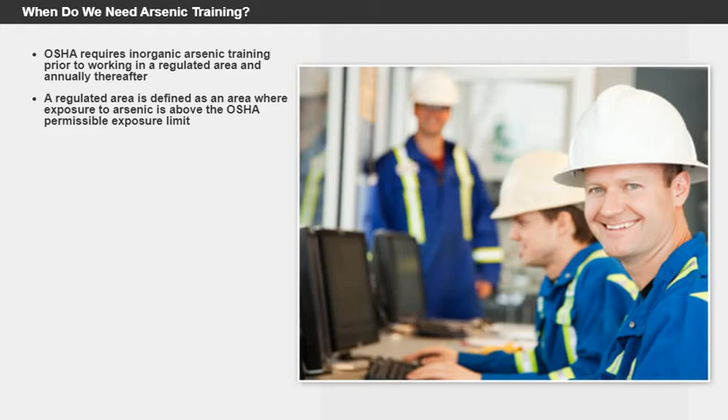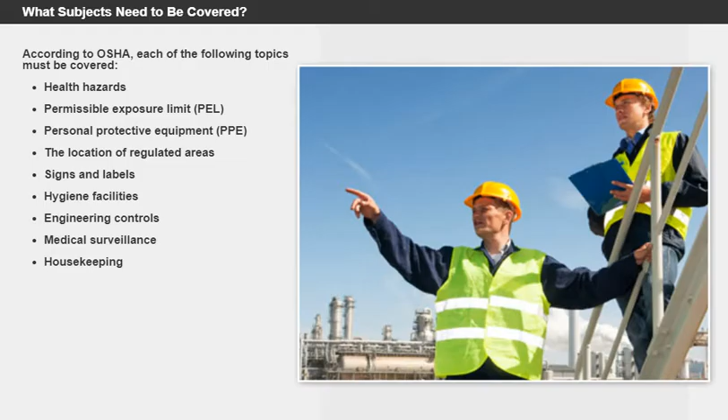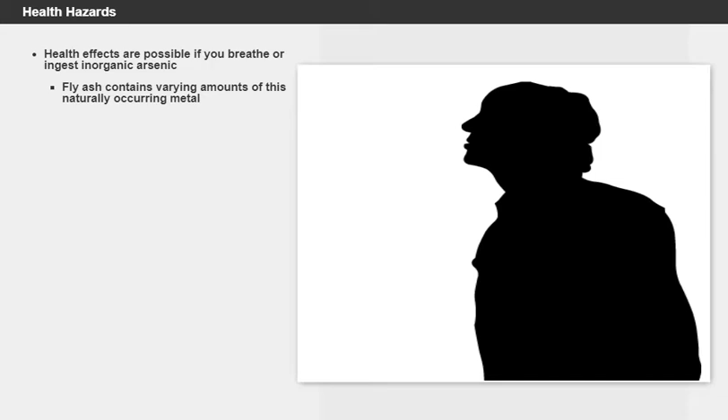Health hazards. Health effects are possible if you breathe or ingest inorganic arsenic. Fly ash contains varying amounts of this naturally occurring metal. Inhalation is the most likely route of exposure, but ingestion is also possible.

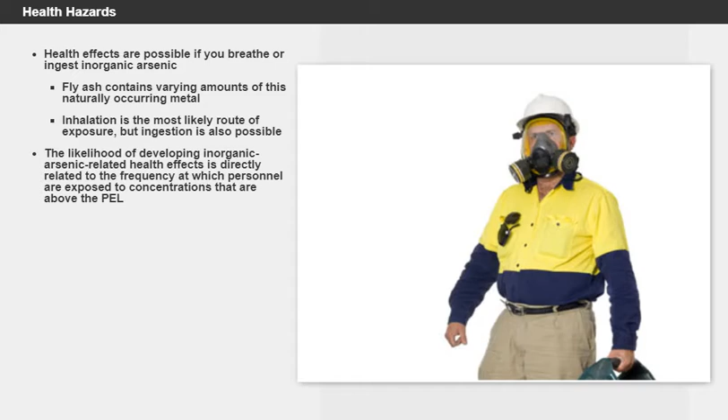The likelihood of developing inorganic arsenic-related health effects is directly related to the frequency at which personnel are exposed to concentrations that are above the PEL. OSHA requires that physicals be offered for anyone who spends more than 30 days per year in a regulated area.

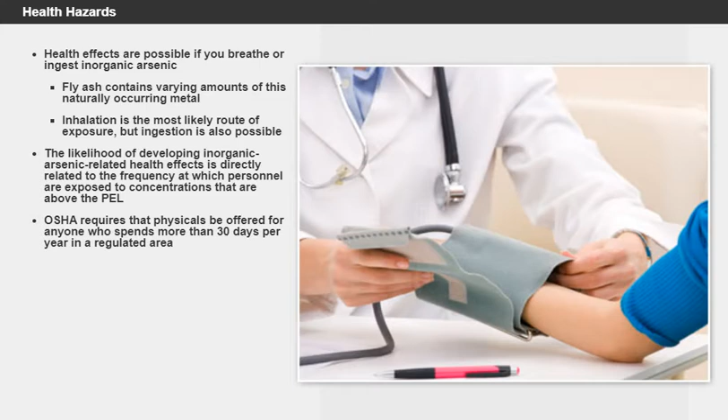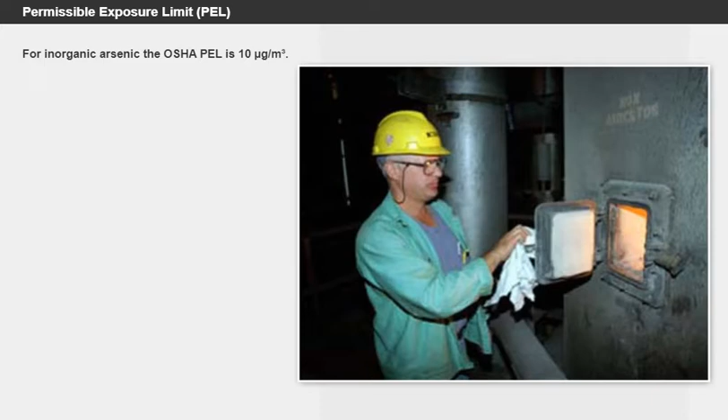Permissible exposure limit, or PEL. For inorganic arsenic, the OSHA PEL is 10 micrograms per cubic meter. This means that the average person can be exposed to 10 micrograms per cubic meter for 8 hours a day, 40 hours a week, without adverse health effects.

Any work area having greater than 10 micrograms per cubic meter must be established as a regulated area. The PEL refers to airborne concentrations of inorganic arsenic.

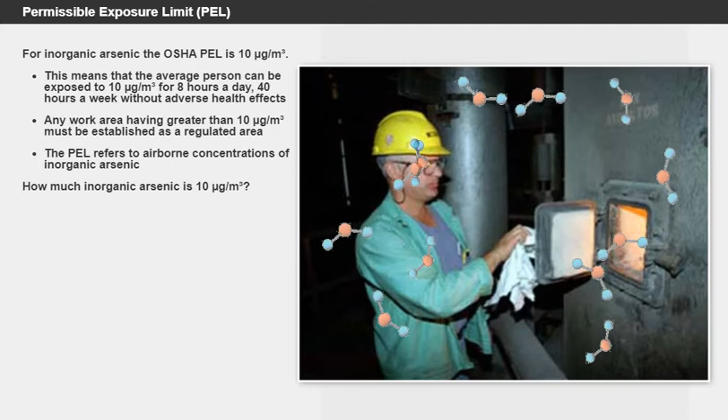How much inorganic arsenic is 10 micrograms per cubic meter? Air sampling equipment is necessary to identify how much inorganic arsenic is present in the air. There are many factors that influence the airborne concentration, and it is not possible to determine the concentration without air sampling and lab analysis.

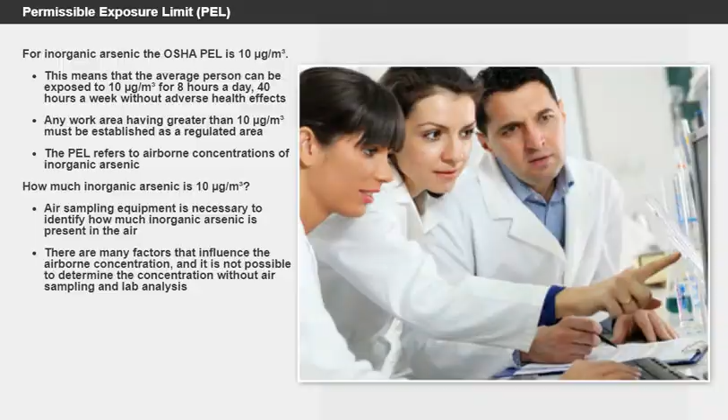Personal protective equipment. Respiratory protection is used to protect personnel from inhaling inorganic arsenic. Other PPE, such as coveralls and gloves, are used to help keep the fly ash within the regulated area and off your skin. Respirators can be easily cleaned to remove any fly ash, but coveralls need to be laundered.

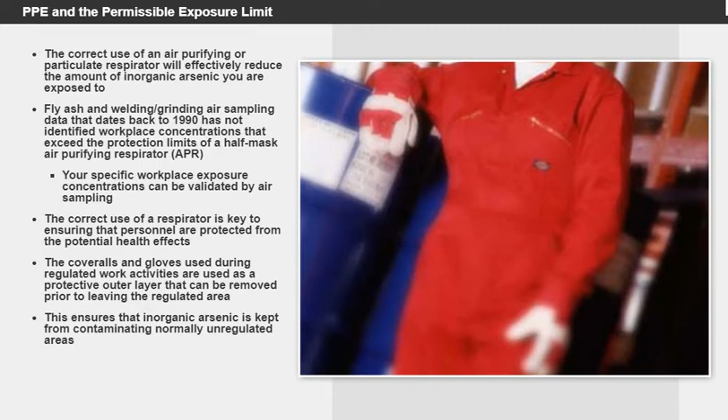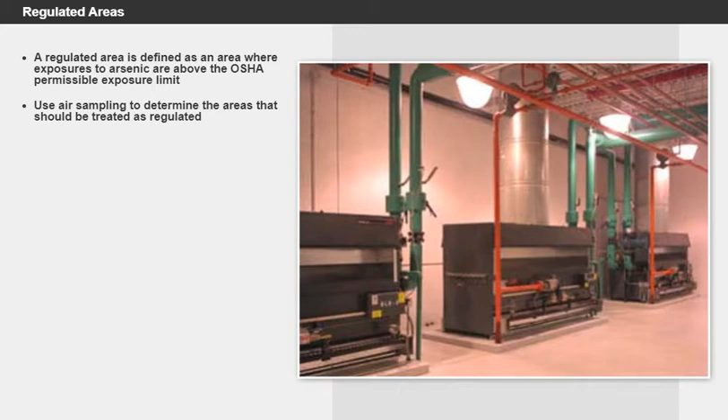Regulated areas. A regulated area is defined as an area where exposures to arsenic are above the OSHA permissible exposure limit. Use air sampling to determine the areas that should be treated as regulated. Examples may include boilers and boiler rooms, a furnace and its surrounding areas, any ductwork and stacks from a furnace, air preheaters, airflow wind boxes, ventilation penthouses, and any bag houses, ash hoppers, or silos.

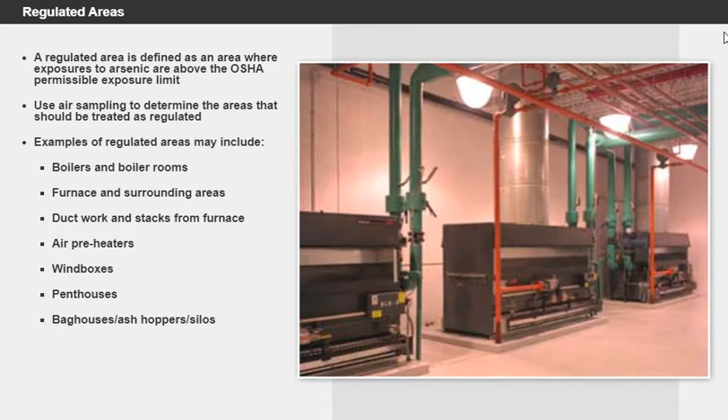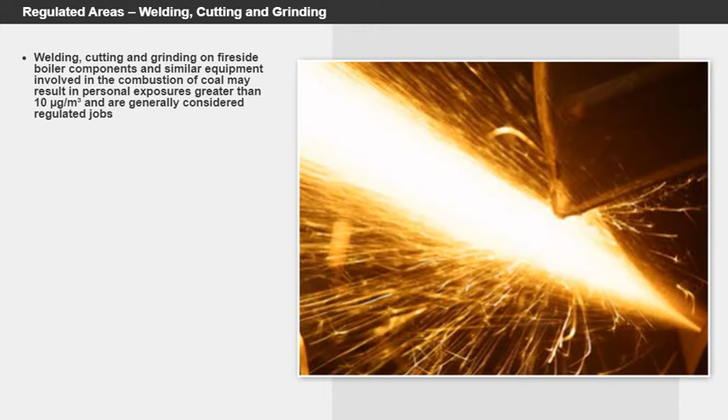Regulated areas: welding, cutting, and grinding. Welding, cutting, and grinding on fireside boiler components and similar equipment involved in the combustion of coal may result in personal exposures greater than 10 micrograms per cubic meter and are generally considered regulated jobs. Under these conditions, the inorganic arsenic is not in the form of ash and therefore cannot be washed or vacuumed off the boiler components or similar equipment. The high boiler temperatures cause the inorganic arsenic to plate out onto the boiler components. Typical air sampling data indicate that there are no significant exposure concerns at a distance of 6 feet or greater from these activities. Proper industrial hygiene air sampling must be used to determine exact exposure potentials.

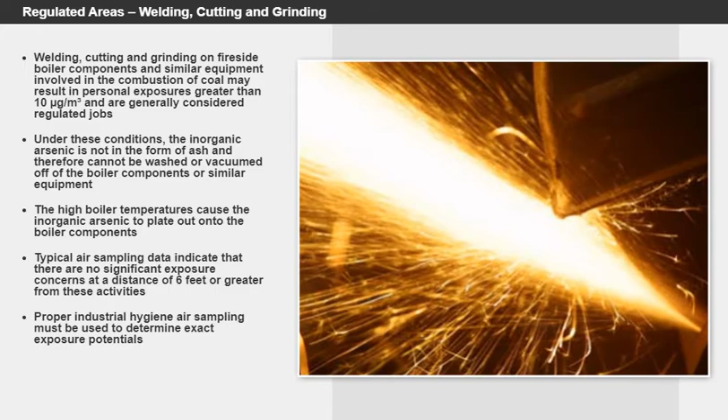Let's try an activity to see what you've learned so far. Fill in the blanks by clicking and dragging the correct words to the sentences.

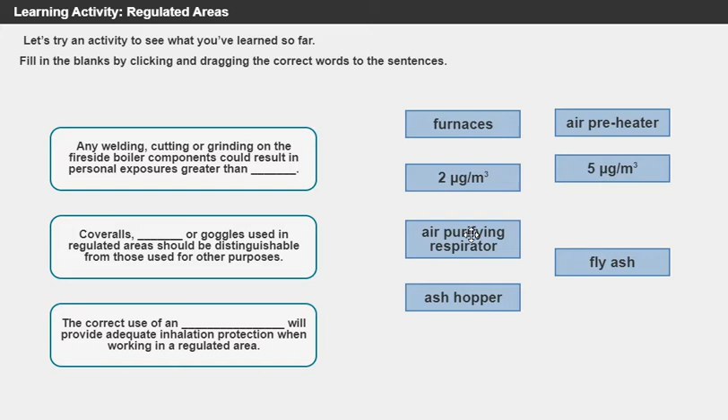Signs and labels. OSHA requires that signs be posted to identify all regulated work areas. These signs must read as follows: danger, inorganic arsenic, cancer hazard, authorized personnel only, no smoking or eating, respirator required.

Hygiene facilities. If you work in a regulated area, OSHA requires that you be provided with hygiene facilities. These facilities are provided so that personnel can wash their hands and face before eating and or drinking, and for showering after the work shift. Under no circumstances is it acceptable to eat or drink in a regulated area. Good hygiene practices before breaks and at the end of your shift will ensure that exposure to inorganic arsenic is kept to a minimum. OSHA also requires that personnel be provided a place to eat meals that is removed from any regulated area.

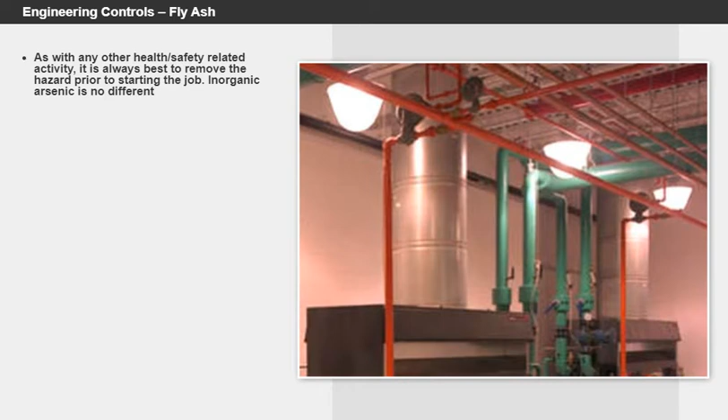Engineering controls, fly ash. As with any other health or safety-related activity, it is always best to remove the hazard prior to starting the job. Inorganic arsenic is no different. For example, a regulated area can be reclassified as unregulated if the fly ash can be removed by vacuuming using an industrial vacuum equipped with a HEPA filter, or washing. The cleaning process may or may not be a regulated activity, but it is best to treat it as regulated until air sampling shows that it is not. Proper PPE must be worn during the cleaning process.

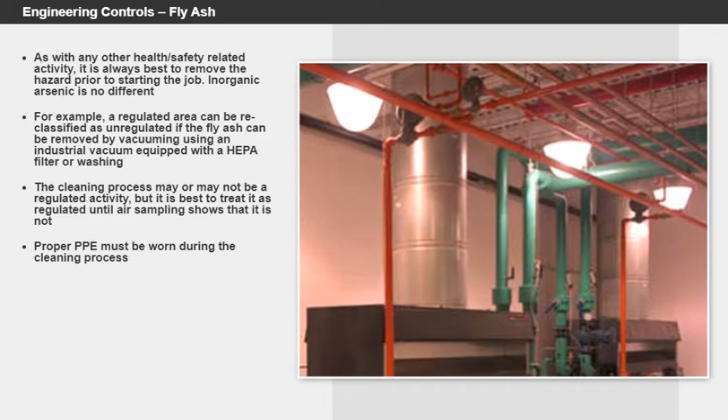Engineering controls: welding, grinding, cutting. For regulated jobs such as welding on the fireside boiler components, the task of removing the inorganic arsenic is not simple. The arsenic metal actually gets plated out on the boiler components. As a result, it's not reasonably possible to remove the inorganic arsenic prior to welding, grinding, or cutting.

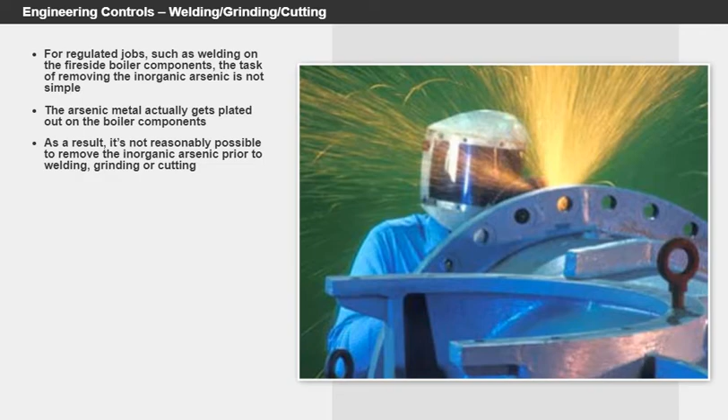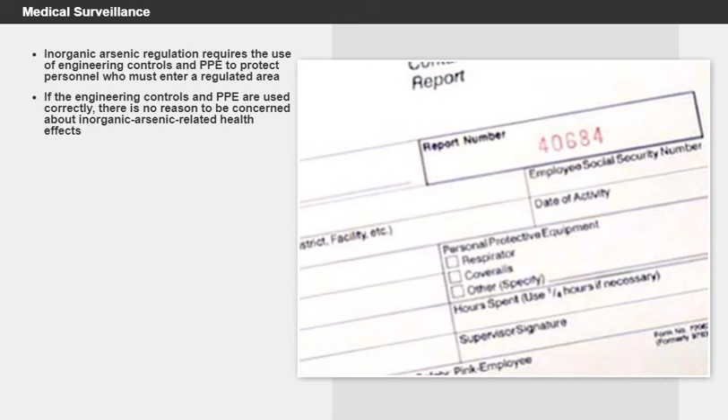Medical surveillance. The inorganic arsenic regulation requires the use of engineering controls and PPE to protect personnel who must enter a regulated area. If the engineering controls and PPE are used correctly, there is no reason to be concerned about inorganic arsenic-related health effects. In order to ensure effective personal protection, OSHA also requires that the employer implement a medical surveillance program. It is your responsibility to fill out a contamination exposure time report form for every shift that you enter a regulated area. Personnel exceeding 30 days per year or 240 hours in a regulated area will be offered a medical examination. Contact your supervisor if you have any questions.

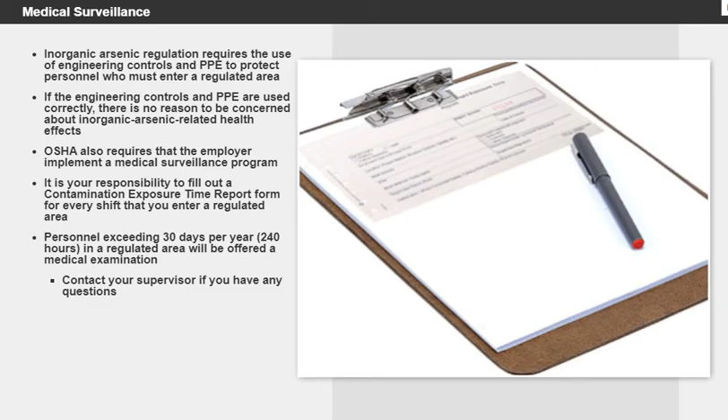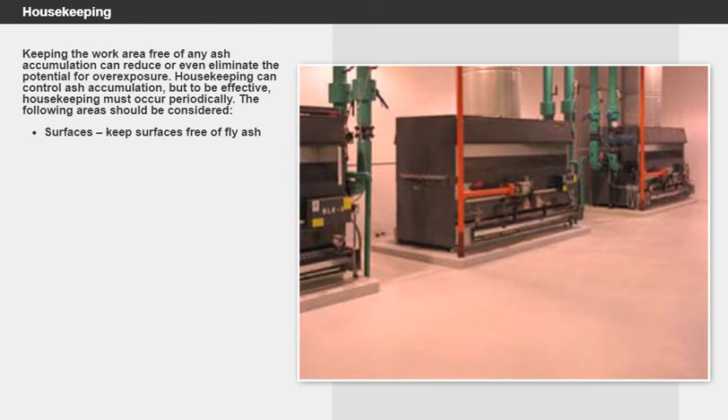Housekeeping. Keeping the work area free of any ash accumulation can reduce or even eliminate the potential for overexposure. Housekeeping can control ash accumulation, but to be effective, housekeeping must occur periodically. The following areas should be considered. Surfaces: keep surfaces free of fly ash. Vacuuming: HEPA vacuums in good working order should be used during cleanup. It's important to ensure that the vacuum is not reintroducing the material back into the work area. Maintenance of equipment: equipment leaks that introduce fly ash into the workplace should be repaired as soon as feasibly possible.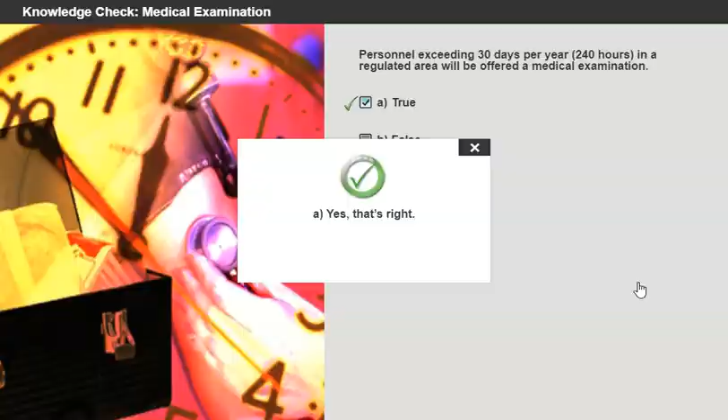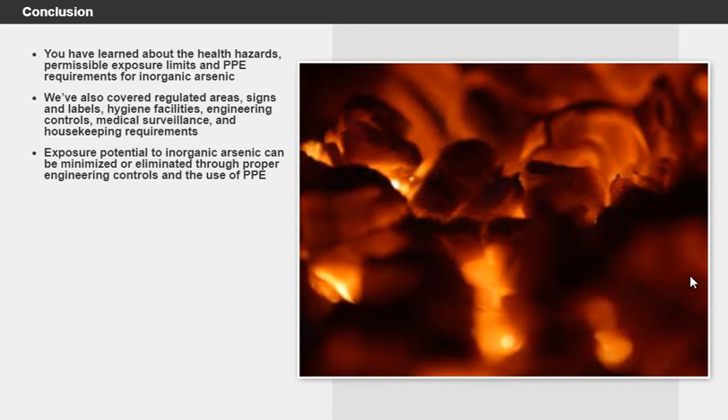Conclusion. You have learned about the health hazards, permissible exposure limits, and PPE requirements for inorganic arsenic. We've also covered regulated areas, signs and labels, hygiene facilities, engineering controls, medical surveillance, and housekeeping requirements. Exposure potential to inorganic arsenic can be minimized or eliminated through proper engineering controls and the use of PPE. All regulated areas identified by personal air monitoring fall under OSHA's inorganic arsenic standard unless the exposure potential can be removed. Be sure to document the amount of time you spend in regulated areas following your organization's policies and procedures. Contact your supervisor if you need further information. This concludes our overview on inorganic arsenic.